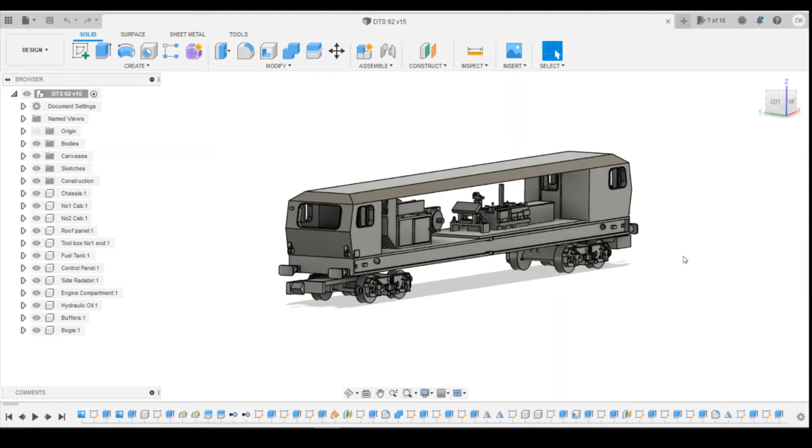In today's lesson, I'm going to continue to work in the underframe detail under here. I'm looking to do the primary equipment, which is in the middle here. So again, we're looking at things here that are really, really complicated, and we're going to just try our best to try and make something that looks a reasonable representation of it. I'm not going to sit and draw everything to the exact size scale.

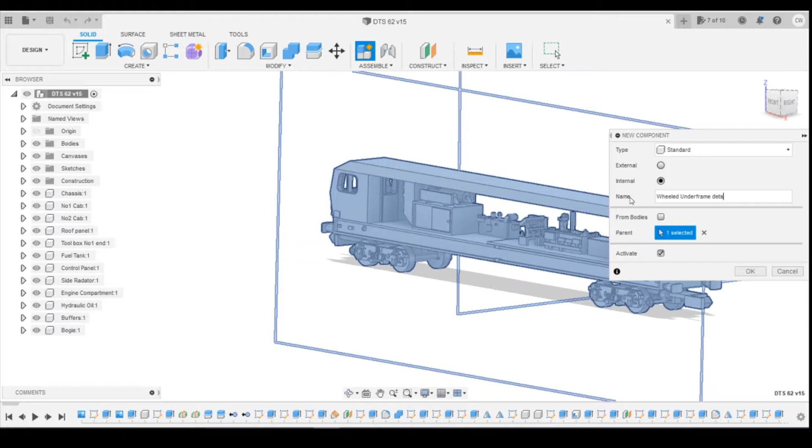So jumping into Fusion, the first thing I want to do is create a new component. I don't know exactly what this is called or how it would work, but I'm just going to call it wheeled underframe detail. It's probably got its own specific name, but for now that'll do to be able to identify what we're looking at here.

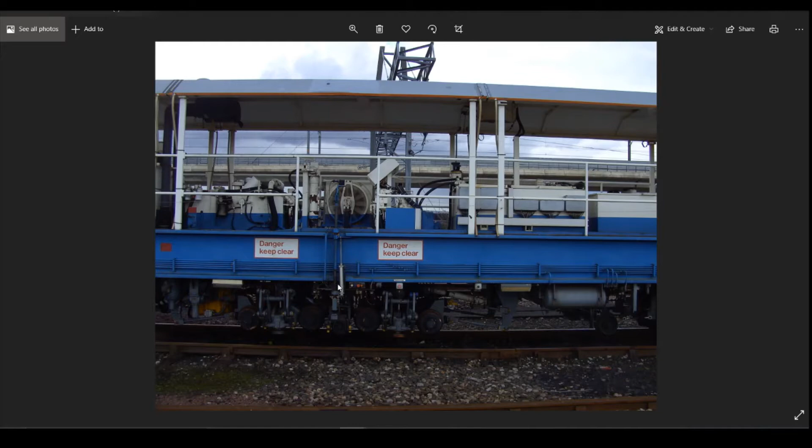So I'm going to start by drawing this wheel here. You can see now it's just offset from the middle here. So I'm going to come back into Fusion. Within this folder, I'm going to create an offset plane. I'm going to use the front surface of this wheel, because obviously wheels are going to be the same sort of size and dimensions. I'm going to create that offset plane from there, so we can start in this sort of area. So we'll create a sketch on that plane. I'm going to just move across to the middle.

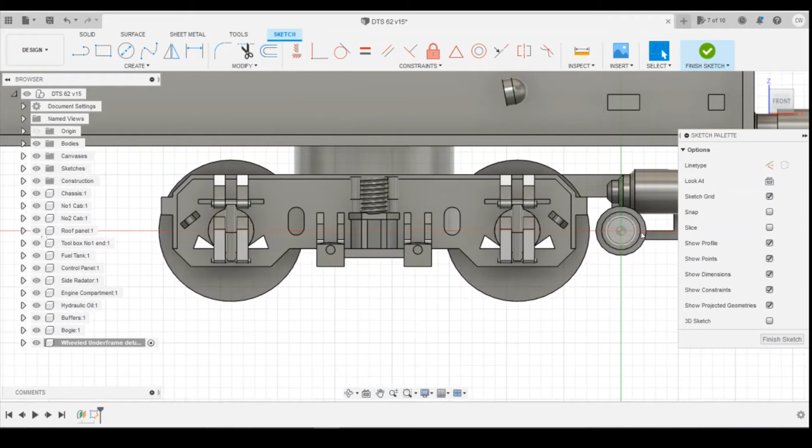Okay, we'll be using a circle. I'm just going to create maybe a 2mm circle. How's that look compared to this one? Inspect this circle here, so that one there. So we've got 1.7, so we can change this to 1.7 just to match it all up. I would say they're probably going to be similar parts.

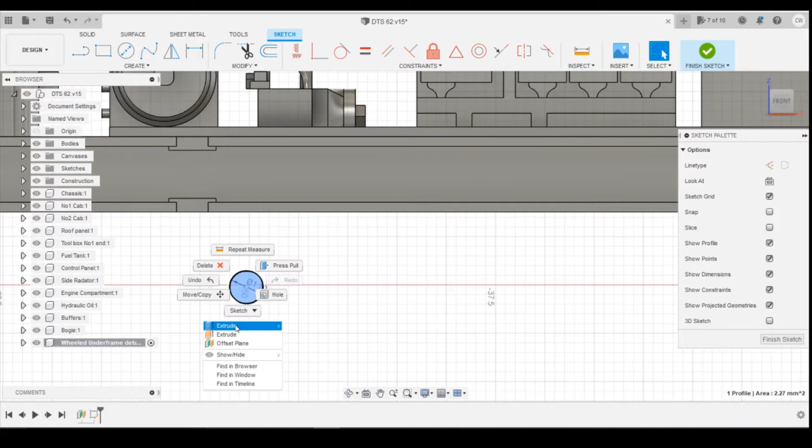So once we've got that front face, we've got to create the wheel depth. So I'm just going to extrude inwards, maybe 0.5 mm or so. Create a new body. I'm going to draw a sketch on the back surface of that. It'll be a little bit bigger just to create the flange. So 1.7, so let's go 2 mm on that. Select the outside and the inside and just extrude that maybe 0.3 mm.

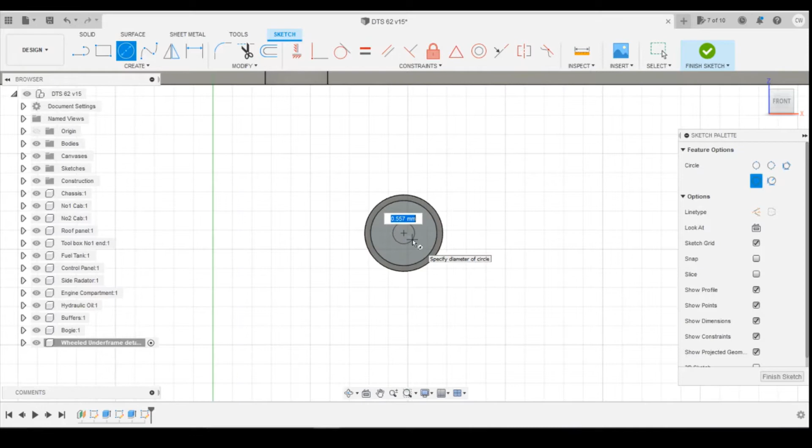Okay, so looking at the picture, we've obviously got what I would imagine is the bearing in the middle here. So we'll create on the front surface just a small circle, maybe 0.6 mm, and then just extrude that probably 0.15 or so, just to give it a little bit of relief there.

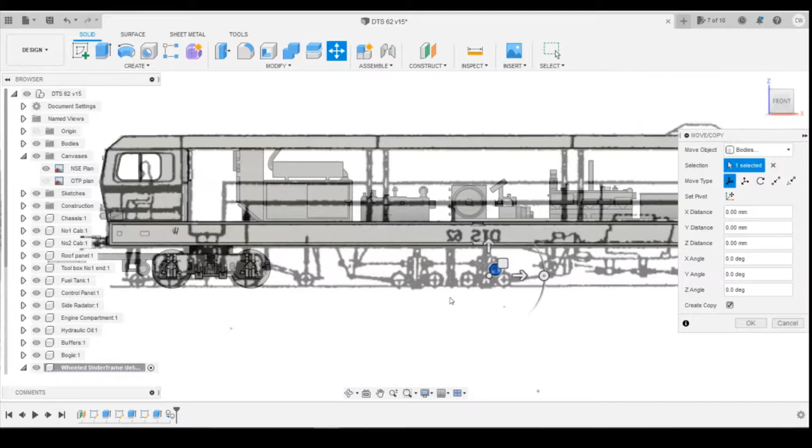So next I think I'm going to copy this across and then we'll look at adding support structures behind it. So if we drop the bodies down, select and move, and create a copy. Now unfortunately we can look at the top on the canvases, they are there, but they seem to be offset to the side for some reason rather than being centered. Looking at the pictures here, that one there, you can see how that middle is pretty much in line with the fan, which is roughly where we've got it here. So I don't know if the sketch canvas is wrong there or not, but I'm going to go with this position here.

So yeah, we've got create copy. I'm just going to drag it over, probably maybe 5.5 mm. I'll go with that. At the moment, it's probably sitting a little bit high, thinking about it. We can see if we can move those two down. If we look at the height position, it's difficult to tell really from these photos.

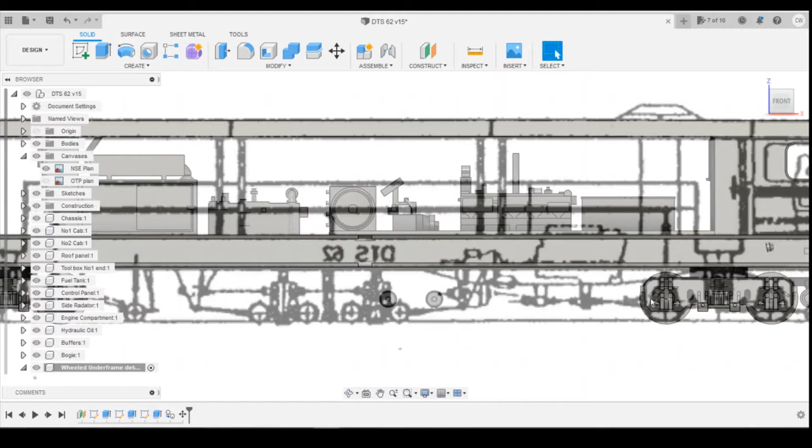So height-wise, that looks like it's sitting in line with the axles, which we can see, yeah, that's probably in the right place actually. That's roughly in line with the axle there. Okay, so we've got the two wheels.

Let's turn that canvas off. And look, if we look here, you can see we've got what looks, I would imagine, like a rectangle behind here, which the axle sits on, and you've got two diagonal support beams. And I imagine looking at that, they connect to this, maybe. Yeah, they maybe look like they're connecting to that.

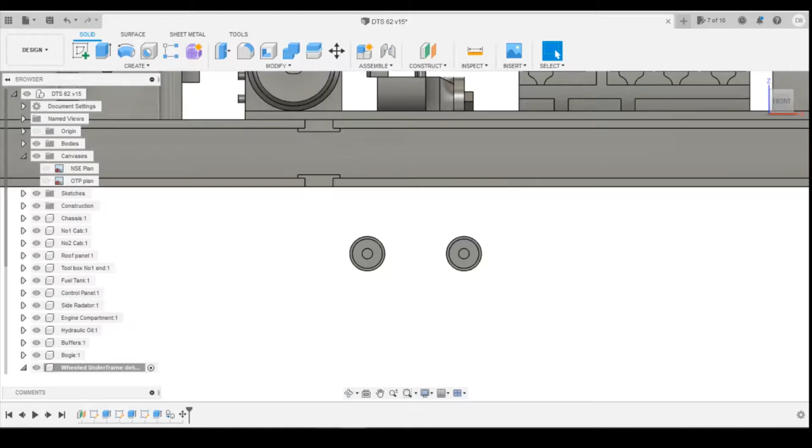So we can start by just drawing this rectangular piece that goes across the back. See how it doesn't come all the way to the outside, so it doesn't stick out either end. So we come into Fusion, we'll spin this round, so we're looking at the back of these wheels. Create a sketch, it doesn't matter which one you select. Okay, and I'm going to create a rectangle. I'm just going to drag it across like this.

We can dimension that from there. Side to the midpoint of the wheel, we'll go 0.6 millimeters. If we do the same on the other side, we might have to project that circle, and then we can dimension off of that. 0.6.

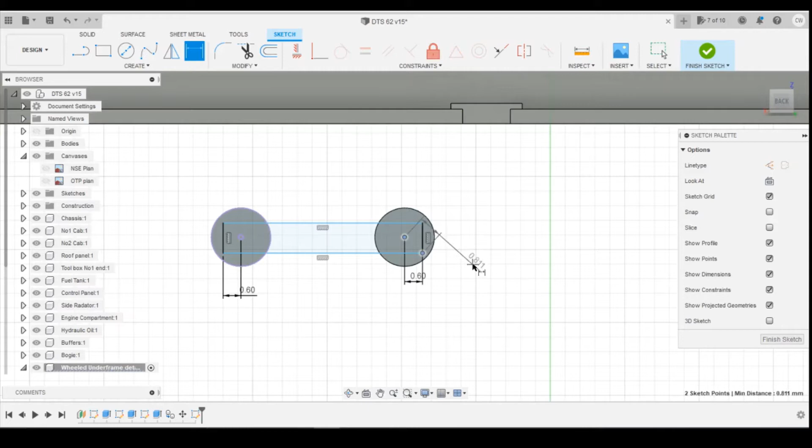Height from the circle downwards. See if we get to rotate in the right place. There we go. If we go 0.5, we can then dimension the height of these as 1 millimeter, and then it's pretty much centered there on those wheels. And then if we select the three profiles here and extrude inwards, I'm going to go for about a millimeter, and I'm going to let it join so all these become one body now.

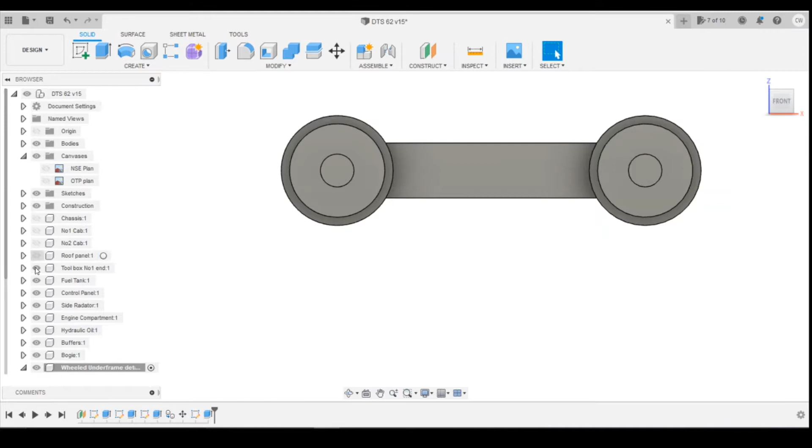So let's turn off all of this lot so that we don't have to look at that. We rotate this round. Actually, yeah, we'll rotate it round. We'll create an offset plane from that inside face of that rear unit, and let's try and work out how far across we want. So it's this.

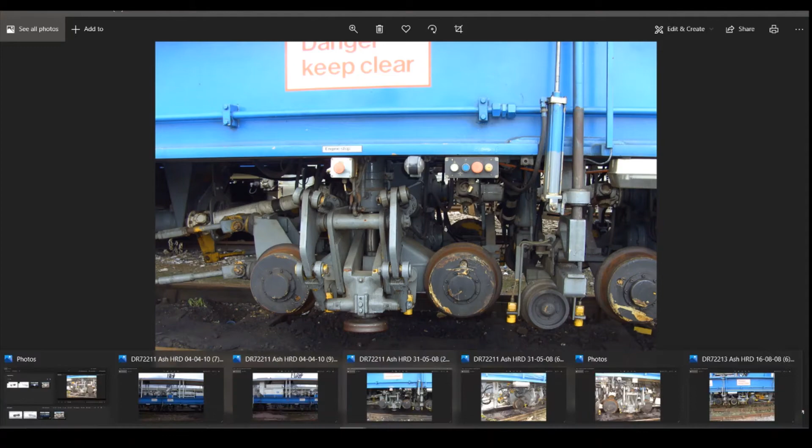Okay, so let's put it. I'm thinking about there. 2.2 millimeters in. We can probably do this upright, maybe 0.3, 0.4 thick, and then we'll have another one coming up this side here. Okay, so yeah, 2.2 across, and we create a sketch on that surface.

We're going to project in the whole of this box here, so we can draw around it. Okay, click on that. Okay, I'm going to slice.

The wheel not disappearing. The wheel not a separate part. Why is that not slicing? Ah, it's because it's the other wheel, that's what we're looking at. Of course.

Okay, so let's think about the sketch. Let's get this one here. So, coming out of the bottom level, I'm going to draw a line up there. I'm going to draw a line that comes out, does it come out beyond the wheel? No, it doesn't. It probably comes to the front face. So I'm going to draw to that position there. Let's define that length. We'll go 0.7.

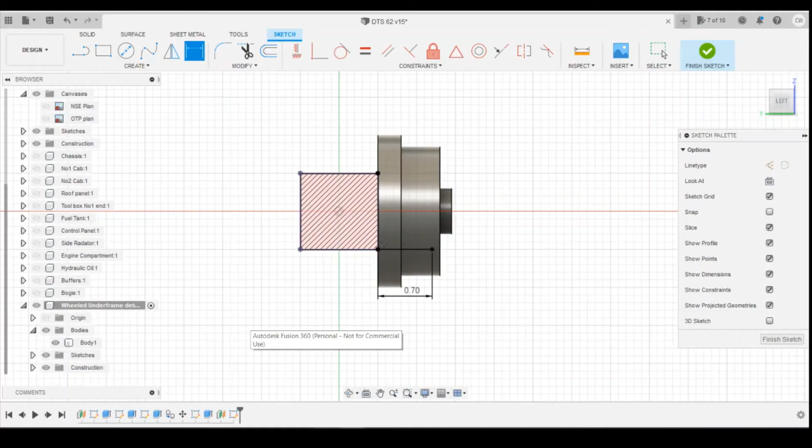Okay. This, I'm going to draw it up and over. So it's going to be up high, so I'm going to put it in sort of this position up here. Does that work right? Because it's going to have these diagonals come up that meet it.

So let's draw a line, let's diagonal that up. We'll come across the unit like that. And this curve looks like it goes to where the back of this is. So if we create another line that comes up there, we're just going to use this as like a construction line there. And we're going to create an arc.

Tangent arc. I'm going to go from that point to that point there. And I'm going to trim off that edge. We've got the curved up and over unit.

This looks like it's maybe 6 inches or so thick. So if we now draw a line, if we come up 6 inches, it's going to be 1 millimeter in gauge. And then we draw a line, just come across like that. I'm going to draw a diagonal line that comes up and meets it. And then we're going to have to curve the top off there.

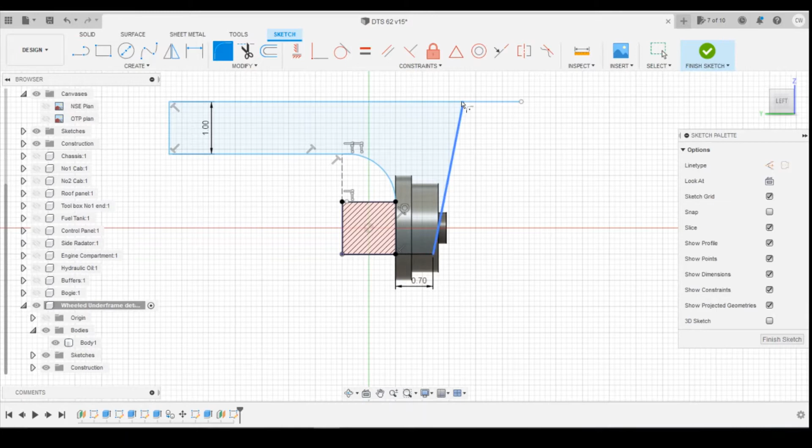So we can fillet between that line and that line, go maybe 0.4 on there. Let's define that angle there. So that measurement's fine, I didn't want to do that, but it's done it. Okay, so we'll go for 100 degrees on that angle, and then that should define pretty much this bit here. Got to define there, so let's go for 5 millimeters, just so it's defined.

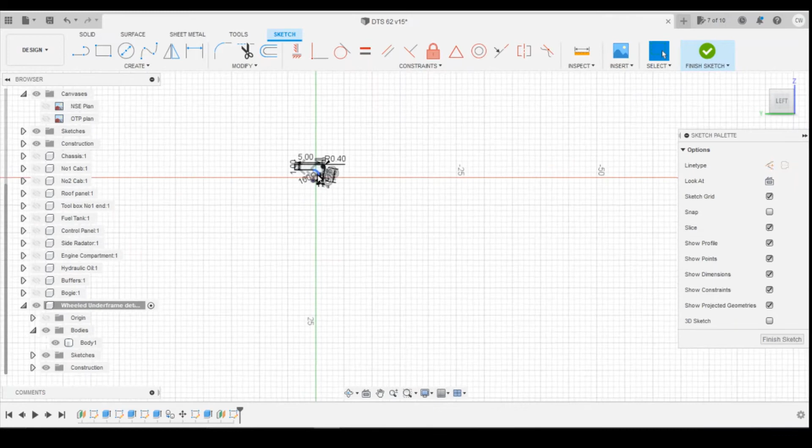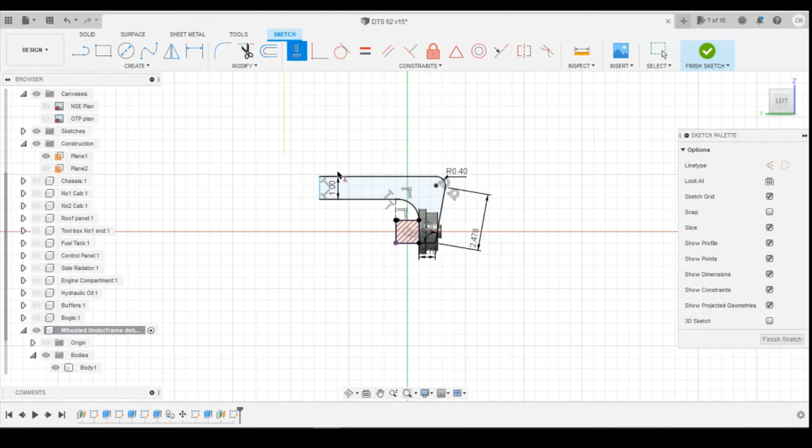I'm going to do this all the way across to help make this the mirrored part over. So I will have to get the midpoint. That one, I'll delete that. And I can constrain that corner potentially to the midpoint. Maybe not, maybe horizontal, vertical to the midpoint. Nope.

I'll fix that in a bit, I'll come back to that. So let's extrude that. Let's go the other way. And I want that to be minus 0.4, I think. So we can get away with having that thinner piece here because it's supported. We're going to have all the other stuff behind it to give it extra strength.

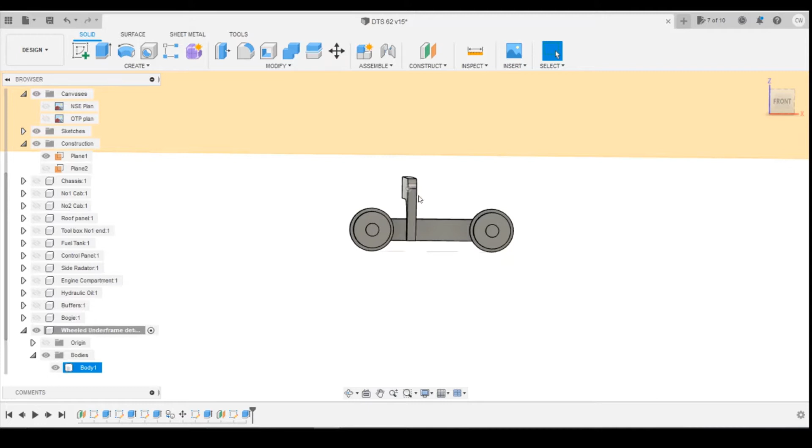Okay, happy with that. What I want now is, let's spin this round. I'm going to draw the diagonal piece which comes upwards on the back. So this piece here, and we're going to draw that, and it's going to meet up. Actually, it doesn't actually look like it touches, but I'm going to get it to touch for extra strength.

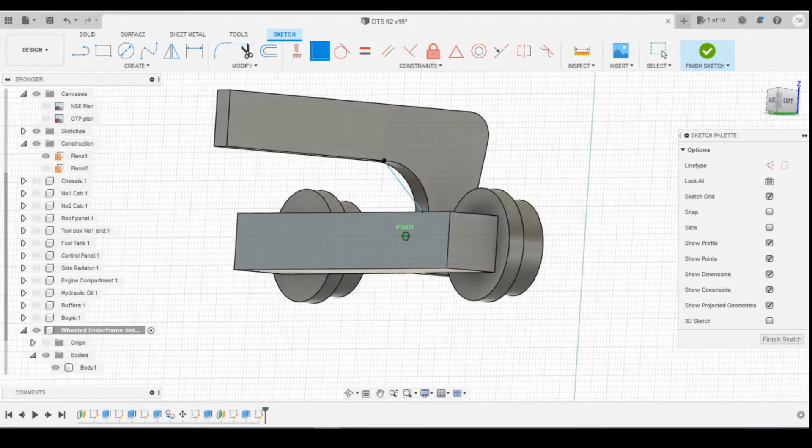So I'm going to draw a sketch on this back surface of the machine part here. I'm going to draw a line, and we'll go up to that line there. So I get it to be coincident to that corner. Okay, you can see where I'm going with that, and then define distance there for 0.9 millimeters.

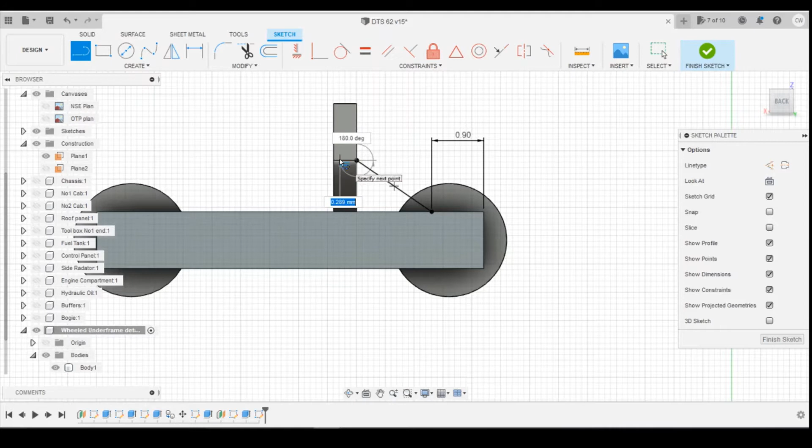And then I'm going to bring that line across, coincident to that corner, and then down to the bottom rail there. That's closed that off, we've got that triangular piece there. I'm going to extrude that, level the front surface of the unit, tell it to join.

I think I actually wanted this corner curved. Let's just go back in the history to that point. Edit the sketch, it was curved. What's caused it is me extruding back into it. I'm going to leave it as is because I want the extra support in here, so this is all protected.

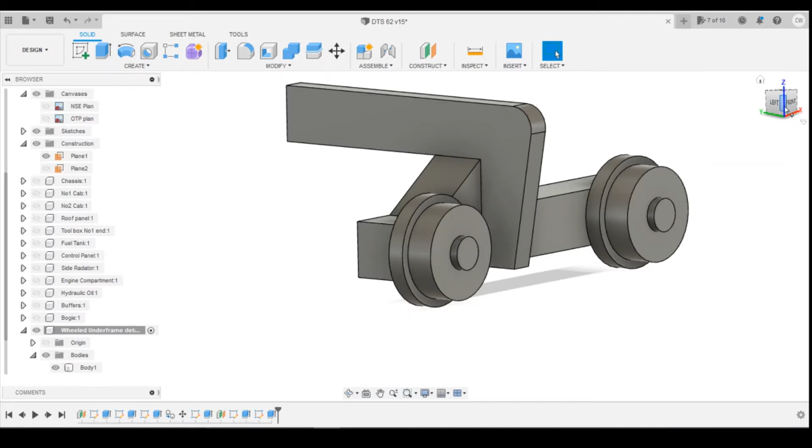Okay, let's look face on now. So that's this piece coming up that we've just drawn. So now I'm going to draw that one going in there. What I'm actually going to do is I'm going to split this in half.

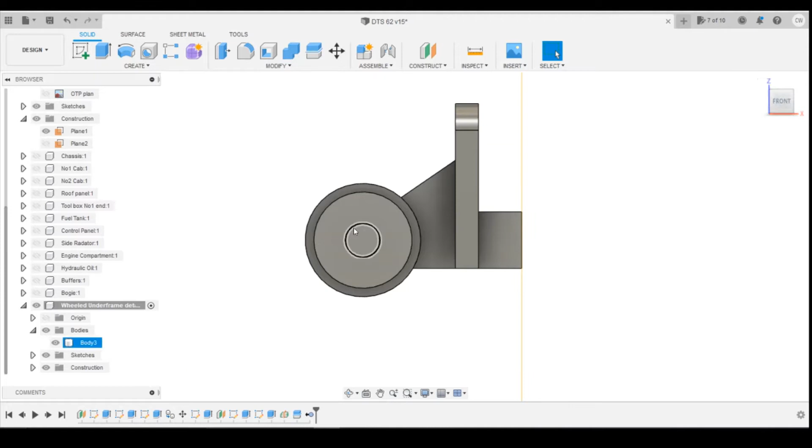Let's create a mid-plane, so you want a mid-plane between the end of the back piece there and that back piece there. And then I'm going to split the body using that mid-plane. And I'm going to remove body one, keeping this part. And whatever I do here, I can just mirror across. Turn that construction plane off.

Okay, so the next piece, as I say, is that coming down here to this circular piece, and that's got some dampers that come out over the top. So I think I'll draw that arm first. No, I'm going to draw the circular piece first, I think. And we can get everything to match into it.

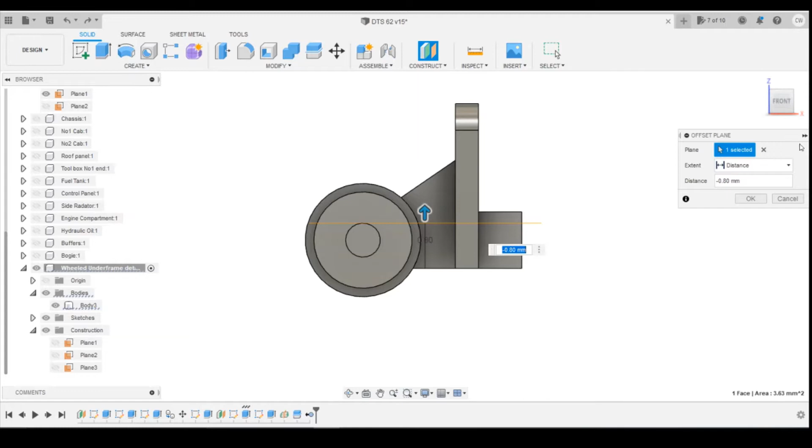Okay, so for that I need to draw on the bottom surface here, because, is that right? No, I don't, undo that. I need to create an offset plane from that bottom surface. I need to come up slightly. So what I'm looking at there is the top of this unit is going to be slightly above the top of the actual point here on the wheel. So about that sort of position, 0.8 from that top. And I'm going to create a sketch on there.

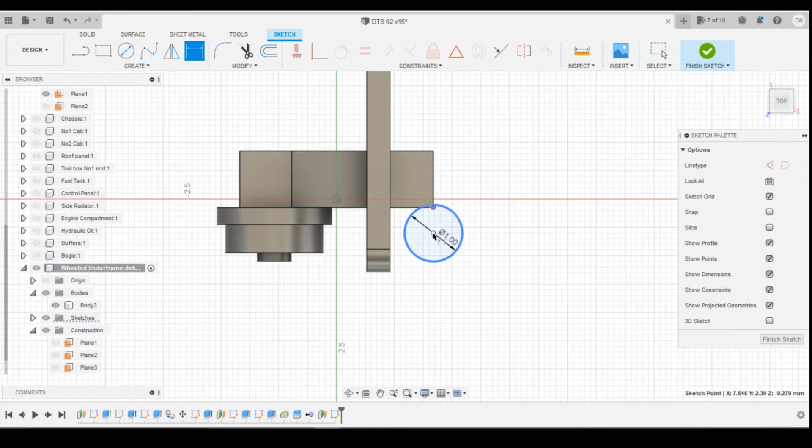And get a circle. Actually, project that point there, and we create a circle in line with that. Let's go for 1 millimeter in diameter. And define a distance from that point of 0.4.

Okay, now we're going to extrude this downwards, so make sure we select all of the... let's got that part there. Select all that profile, extrude this. We're going to come down to... so the bottom of it looks like it's in line with the bottom of the wheel there, before we got this extra part on. We're going to come down to like there. So, 1.1 millimeter, tell it to join.

Okay, so the next thing, now we've got that position, next thing to draw is this part coming in the middle here. So I'm going to create a sketch on the inside profile of that.

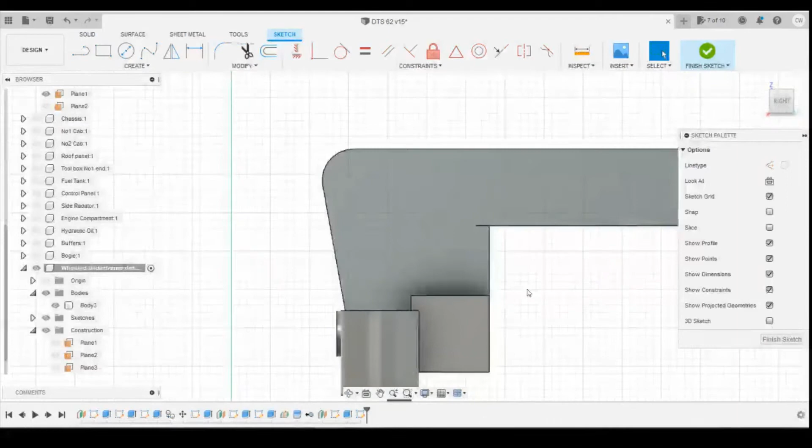So I'm going to project the top rim of the circular part we've just drawn there. And I'll draw a line starting above it, but sort of roughly where it is in line. You can see how that comes and curves down. So I'm just going to be slightly to the right, but slightly above it. I'm going to go diagonally up and snap it into that top part there.

Weird little line there, snap into the top. Let's define the angle there. If that's sorted, I'll go for 25 degrees.

And then I'm going to do a spline point, I think. I'm going to go from there, just use 2 spline points, click on OK.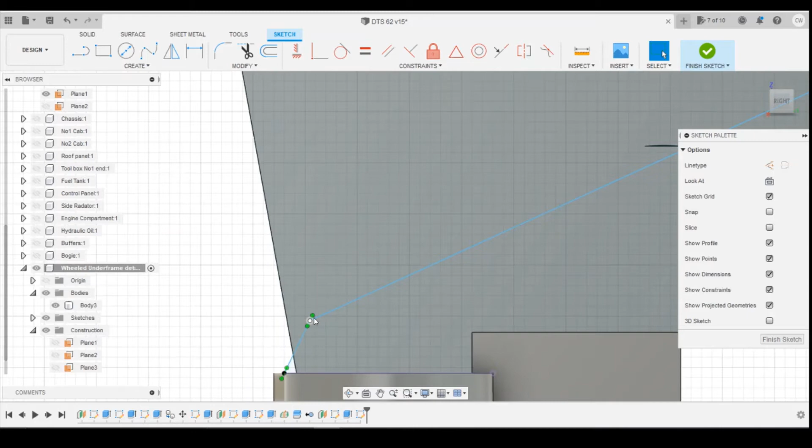I'm going to come to this bottom one here, select the little green line, and tell it to be horizontal, vertical, so that snaps upwards and straight. And then I'm going to tell that one to be tangent to this line, hopefully. So select the little green part, tangent to that line.

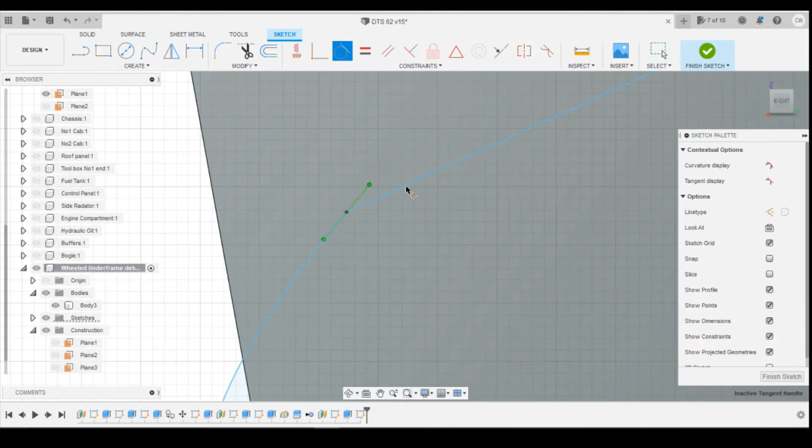It won't do it. It's fine, so it'll come down, and we'll just play, and we'll get the... there. So snap that end to this line here.

You didn't need all these green things. This is an update they've done. I don't know why they've done that. I'm sure there's a reason, but...

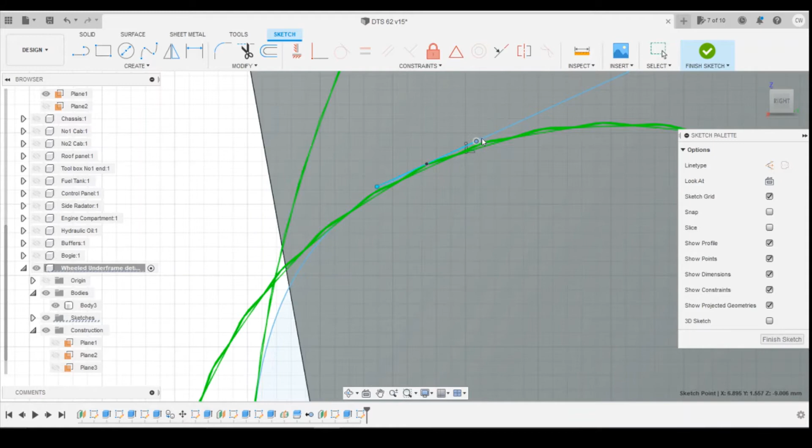Okay, we come out of there. We can see how we've got a curved part there. Well, if we grab that, we can just drag that out slightly, and it'll help to curve that round. So just making this long, see how you adjust it by just dragging. I want it to come up slightly and curve around to it. Yeah, happy with that.

Okay, so now we need to turn the rest of it into a profile. So what's going on at the back? We can't really see what goes on because it's hidden behind the damper. So we can go with that profile quite happily and just extrude that across.

See how it's now coming into touching there.

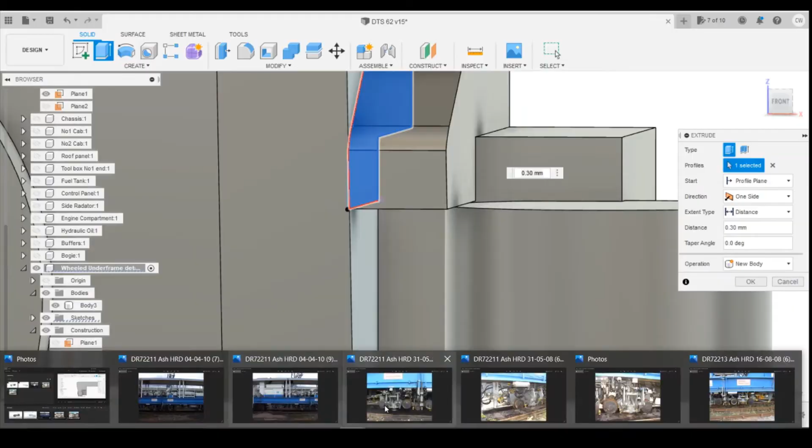Probably what I'm going to do actually is make this circle a bit wider. So pull that across 0.3, tell it to join. Let's go back into that circle now, edit that sketch. You can probably make that 1.5. That's too big. 1.4.

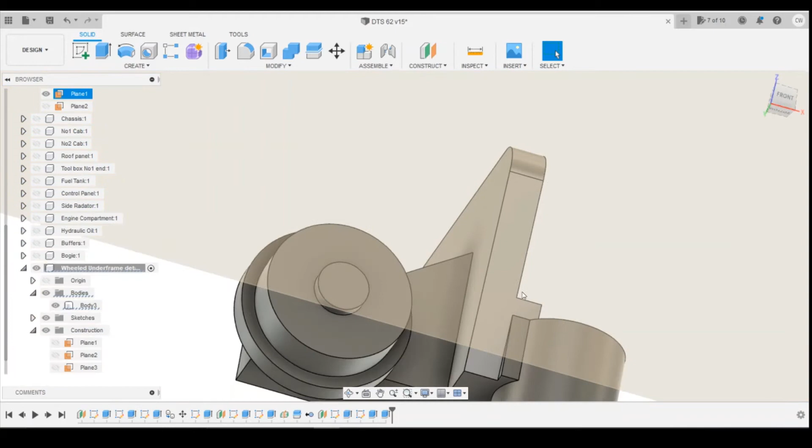Okay, and then I'm going to just grab this bottom surface in here and extrude it down to the bottom of this part, put join. Again, it's just adding a little bit of strength in there. You can't really tell what's going on with that. Not sure why it hasn't... that's fine. Okay, so that's looking okay with that.

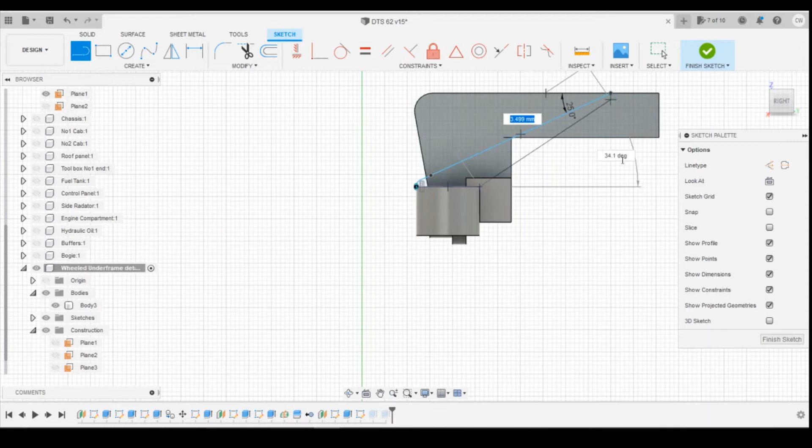That should have gone all the way up. So I probably missed part of the... what I need to do now then, because all that's done is this part, is draw a line from there, in line with that one, and up to that one.

And then edit the feature on that, selecting those two profiles. So we're now adding that all the way across to the back here. So it's all looking at supports, giving the shapes that we're trying to recreate.

Okay, so we've got nothing on the top of here, but behind it there's a damper, and that looks like it's sitting on top of this cross member, and it's going to be in line with the middle here.

So what we can do is, if we spin it round, if we draw a sketch on the inside surface there, and draw a line, find the midpoint, how far up does that damper go? So that goes up all the way into the body.

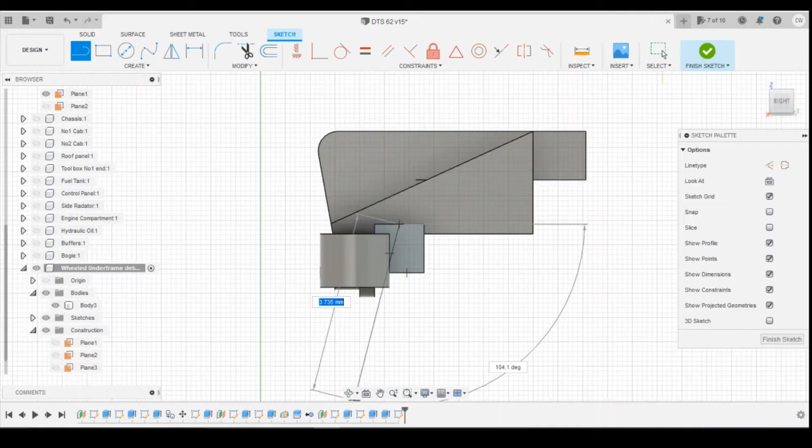I'm actually going to go, let's turn the chassis on. I don't want to go any higher than the chassis, because it's fine to go up to the chassis because it's going to attach there anyhow.

Let's draw it up like that. Tell that to coincide to the top line, that'll stretch that out. Now we've got that line, we can use the pipe tool.

Circle wise, I'm going to go for maybe 0.5 for the bottom. Turn the chassis off because I don't want to join that. Set that to join.

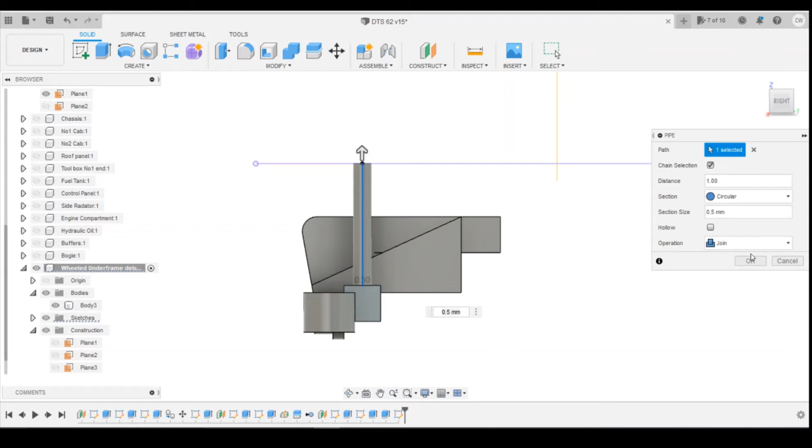That's fine. And then we need that sketch back again, that's number 9. And we'll do pipe again, draw on that line. Actually need to go start from the top.

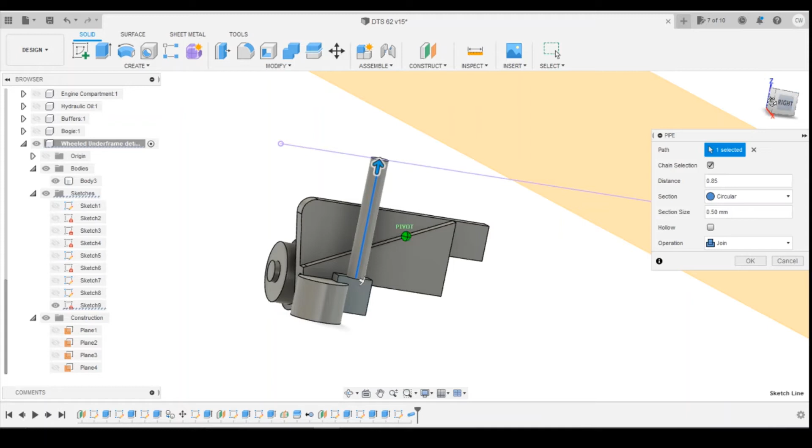That's a pain. Why won't it go from the top?

Okay, so I think what's happened is because I drew it from the bottom to the top, it's trying to go up the pipe. So what we're going to do is go back in this pipe, edit that feature. We're going to change that to 0.8, and then we're going to create a pipe again using the same feature. This time I'm going to tell it to cut. No, that's not going to work either.

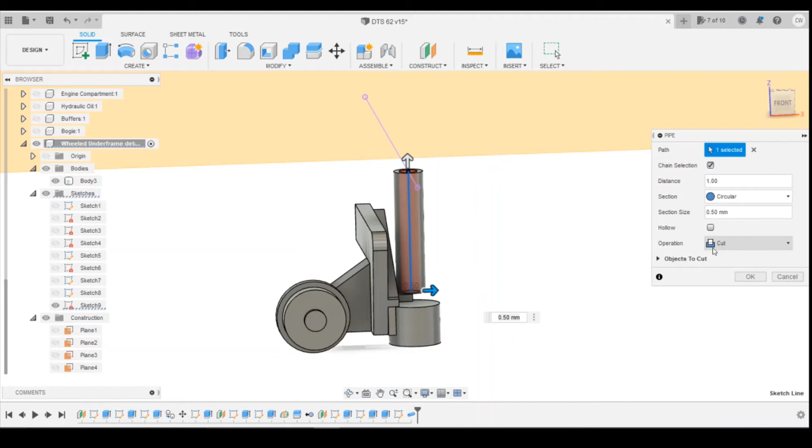Okay, so that's not going to work. So what I'm going to do is create a sketch on the bottom surface of that circle. Use a circle, get the midpoint. So we know that's 0.8. So if I go 0.5, which is what I wanted in the first place, I can select those two profiles. Why is that not a profile there? Okay, 0.8 circle. Select the profiles there, and then extrude that upwards, and that will cut that off.

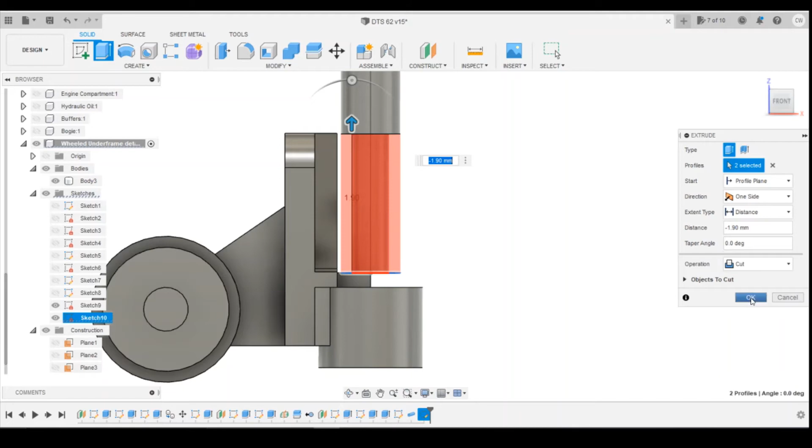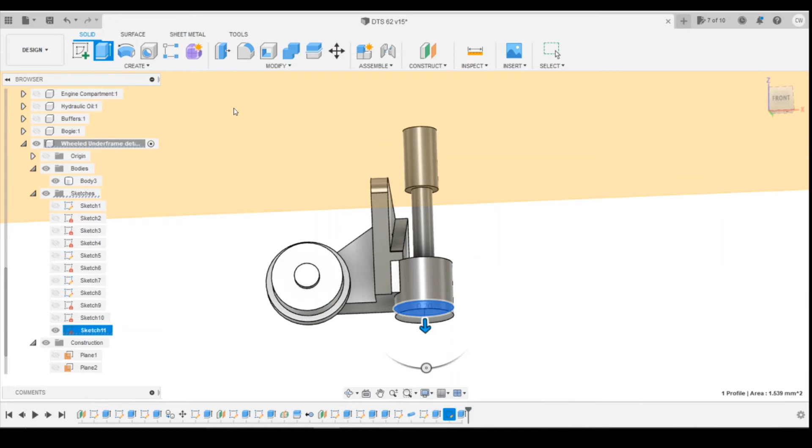Okay, so if we now get this smaller wheel drawn on the side here, what that probably requires is this to have an extra piece coming out of smaller and then bigger again. So I'm going to create a sketch on that bottom surface. Actually, no, I'm not. What I'm going to do is just extrude that down slightly. So I come down maybe 0.2, tell that to join, and then I'm going to chamfer off the bottom edge, 0.2. That's what I'm after. And then I'm going to extrude that down.

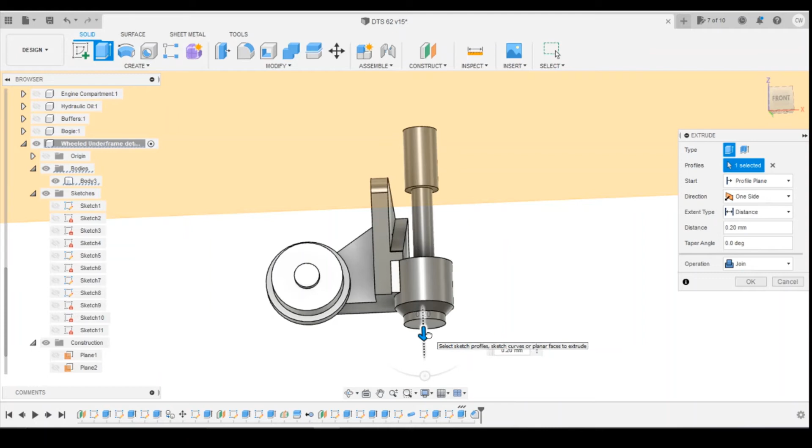Maybe 0.3, and then it's going to have a sketch on the bottom surface for the actual wheel here. I'm going to do the extra wheel, say 1.8. It's gone 1 for some reason. 1.8, and then select that profile and extrude that. How does that look? I think that needs to probably be a bit higher actually.

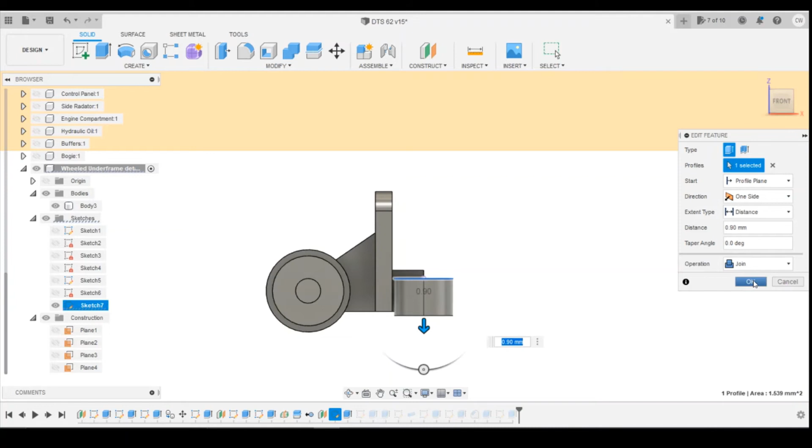So what we can do about that, join to start. Okay, I'm probably going to have to shorten this bit. Let's have a look at this feature. Let's bring that up a little bit. I'm going to come up to 0.9 on that. That moves all that up. Maybe make that little bit in there a bit smaller. Let's go to 0.1.

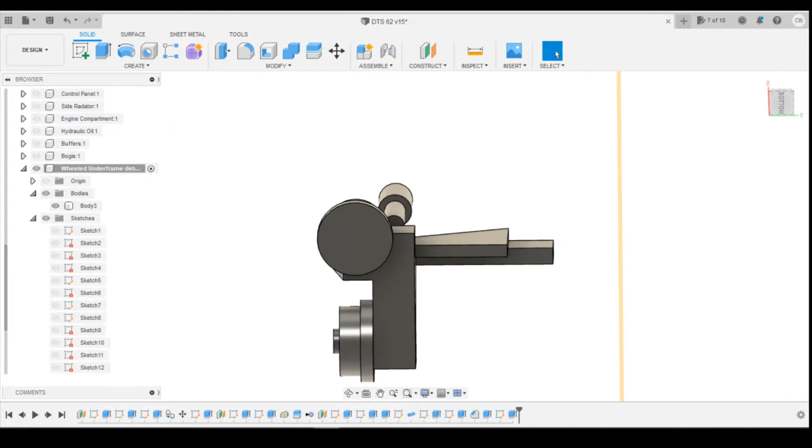That's probably better because that's in line with the wheel, and this I think is supposed to run on the edge of the rail. So having that in that position probably would sit better. Probably supposed to sit further out as well. Wait a minute, look, see, it twists. This is what these arms are probably here to do. Okay, so it doesn't really matter at the moment that it's sitting in, because we can work it. This whole thing's going to pivot out of the way. So yeah, I think I'm going to go with that as it is.

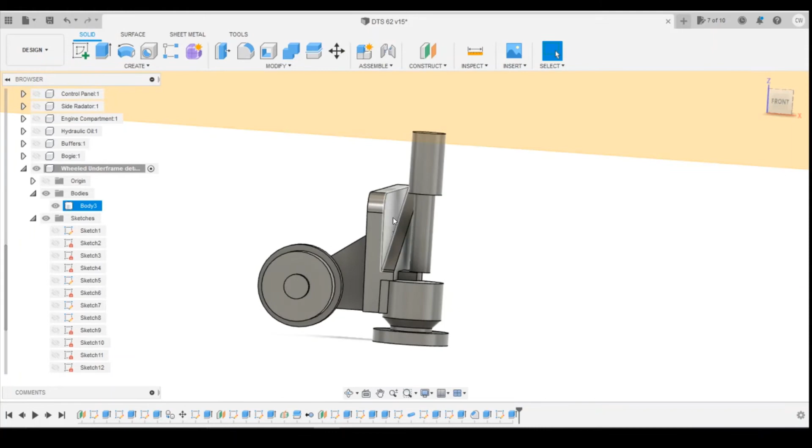Okay, so the next thing I'm going to do is put this rod coming across there. I think that would be on this one. Don't want to do that yet. Put it on that surface. Let's find the center point of that curve there. Coincide it, so 0.6 millimeters. I'm going to extrude this. And again, I'm going to make sure it just goes way past that midpoint. I'm going to get rid of all these bits when I chop that down, so I'm not too worried about the length of that for the moment.

Okay, now I need to draw this triangle piece. Let's have a look on that one. So you can see it's not even a triangle piece, it's an odd shaped bit. It's going to be on the outside of that circle. So we can use that circle to create this part going on the outside.

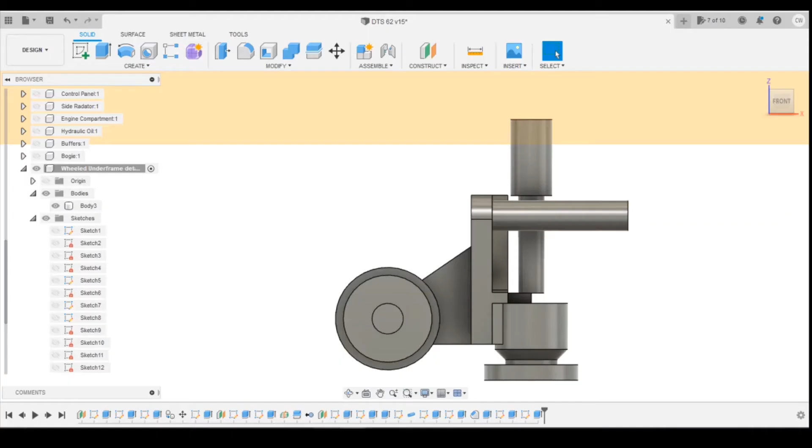Come back into the sketch, I'm going to edit this, I'm going to extrude that. Let's come out 0.6, cut, join, and create a sketch on that top face. Okay, it needs to be slightly bigger, so we're going to go 0.8 diameter circle there. Not that I want a circle, but it's going to create the arc to come round the outside, and then I want to come down straight line at an angle.

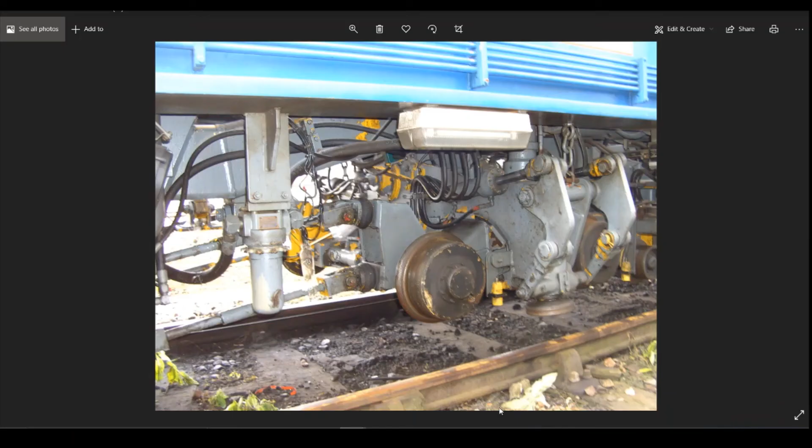I'm just going to come across like that, and I know that's going to cut through this piece at the moment. You'll see what I'll do is if I now click OK, come back up to tangent that line to the circle, that'll come off there at the right point. Find the length of that. There. Try again. Find the length of that. I'm going to go for maybe 0.8 millimeters in length. Maybe long enough, yeah. Because then I'm going to curve round down slightly. So another circular part for there.

Arc. Oops. Tangent arc from there to there. I want a line. Draw it like that. I'm going to put the line parallel, so that line's got to be parallel to there. Undo that. I want the line to be parallel from that one to that one, so they're matching that direction. And the distance between them, I'm going to go for 0.6 millimeters. And then tangent arc from there down to there.

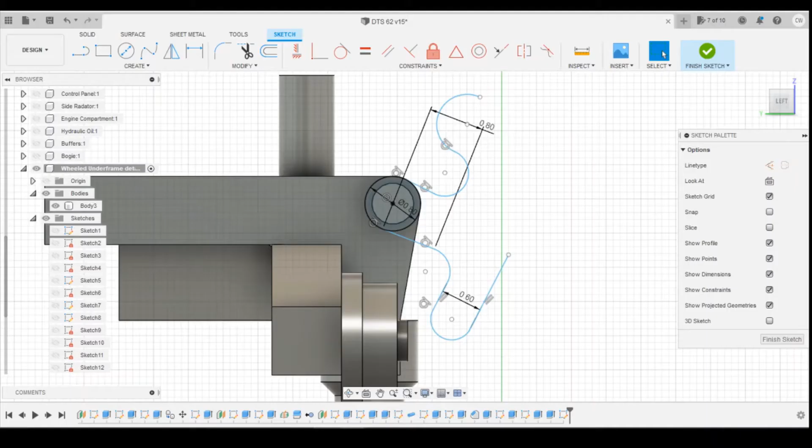Point it down slightly. That and tangent to the circle. Something like that. And then I want another arc to go the other way. So you see I'm using 3-point arc here, coming up here. That to probably come up a bit more and then draw a line from there to there.

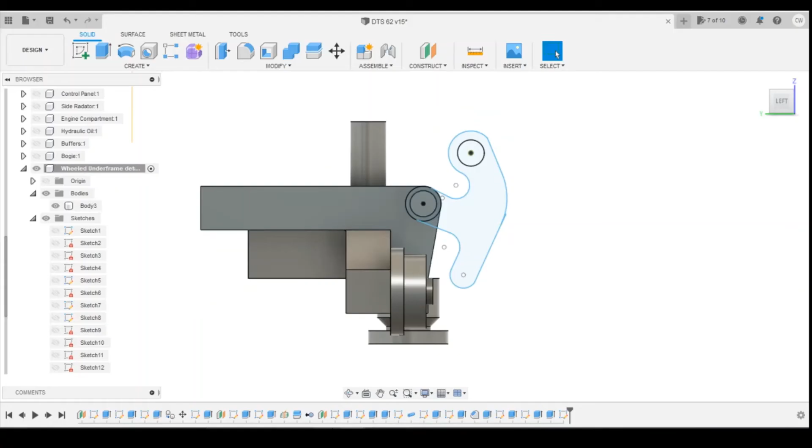Right, let's fix that point so that can't move. And then if we curve this corner off, 1.45 that'll do. It's not perfect, but it's getting to look okay. Is that not joined for some reason? It has. Let's see what's going on there. Trim that little bit off the end there.

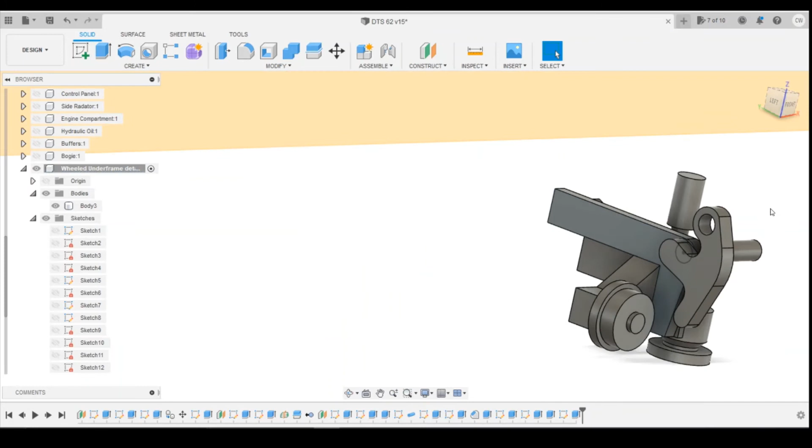I'm going to create that shape. 0.5. See, it's going to have a little bit sticking out there. We need to grab that profile there as well. Set that to join. Grab that inner profile, that circle. I'm just going to extrude that extra 0.7 so it does actually have that little piece sticking out on the top here.

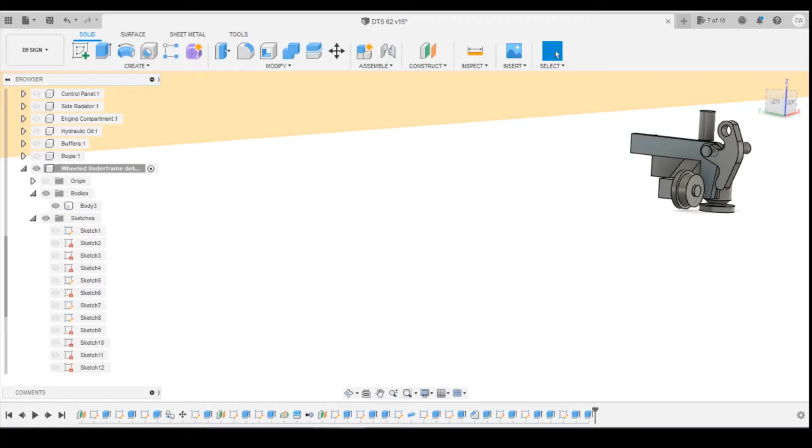Okay, so now I'm going to move down here and create this coming across here. To do that, I'm going to have to split this again because I'm on a halfway point here. So let's split the body, select that one, splitting tool. Let's find that mid plane, which is number 4 there. Split that, we're going to end up with a load of bodies here.

So let's work out which ones we don't need. So that body there, so we can remove number 3. That body there, so that's number 4, we can remove that. And that part there, that's number 5, so we can remove that. We're just left with the half here. Good. Let's turn the construction plane off.

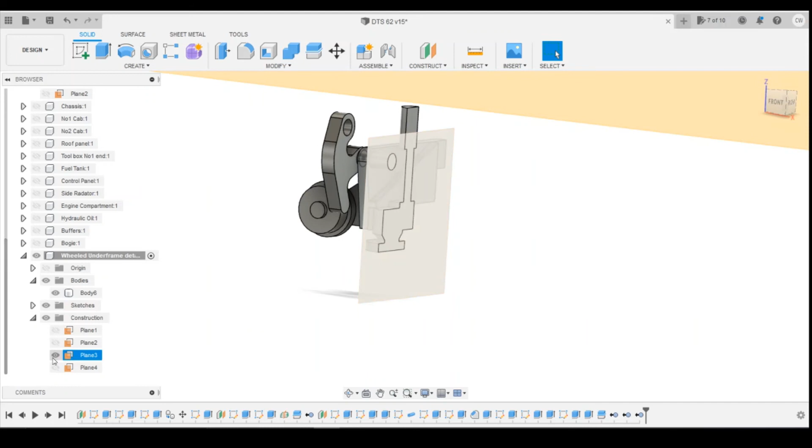Okay, so as I say, we're drawing this, so I'm just going to draw a little circle, rod or something type shaped, and it's going to be sitting sort of in this position. Create on the inside surface where we just cut. Let's create a circle. I'm going to snap the midpoint to that line. I'm going to go for maybe a 0.4mm circle. Define its distance from the midpoint to that bottom part. Find these 2 points here. Let's go 0.2 just for ease.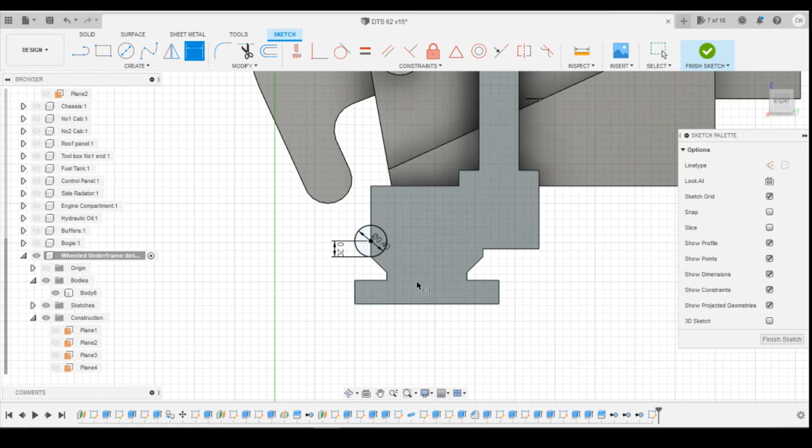Okay, and then we can select that outside profile. Yes, we want the inside profile as well, so we need the whole circle selected. Okay, and you can see on the picture that's going to come across pretty much in line with where that midpoint of this part that we've just drawn is. So we need to go all the way beyond. Yeah, probably because it's going to have a piece coming out of it. So go 1.8 across, tell it to join. Actually thinking this might come up a little bit in a bit.

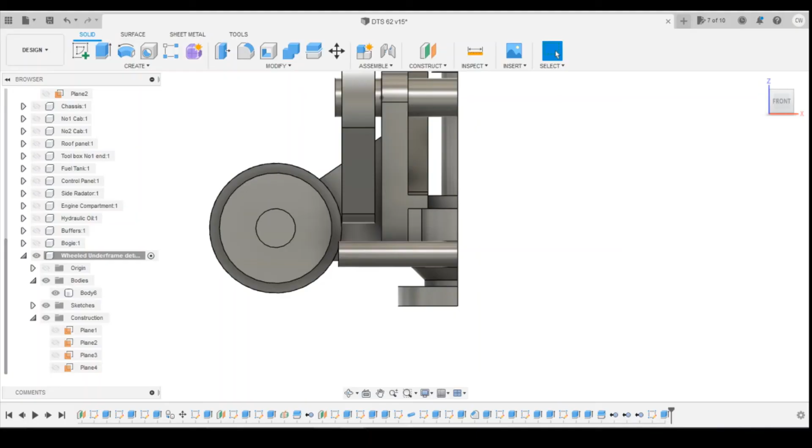Okay, now we need, I'm not going to try and overcomplicate this too much. There's a pipe coming up that's going to go into it. It's got a rod coming through. So, let's draw a sketch off of that outside surface.

I'm going to go for a 3-point rectangle. I'm going to use the 2 points of the arc here. I'm going to come down maybe 0.4, and I'm going to also do the same rectangle above it. So 3-point rectangle, go from those 2 points, come upwards maybe 0.4.

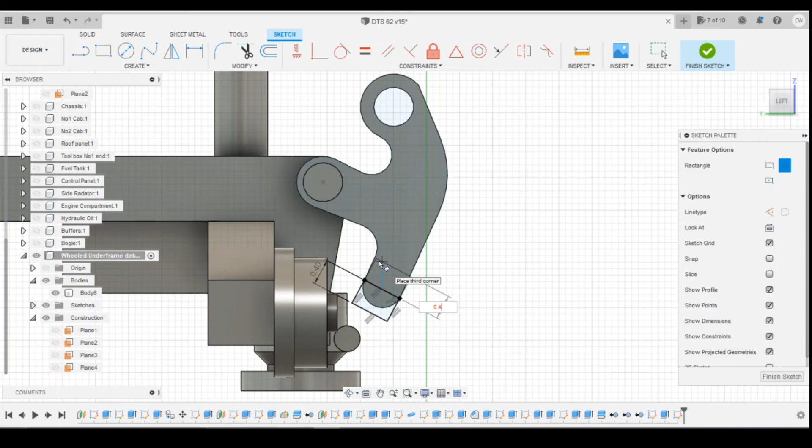Select these inner profiles here and extrude that outwards slightly. Doing 0.2. Tell it to join, and then want to mirror that feature. I'm going to use the mirror plane. If I do that, I'll just get halfway. I need a halfway point.

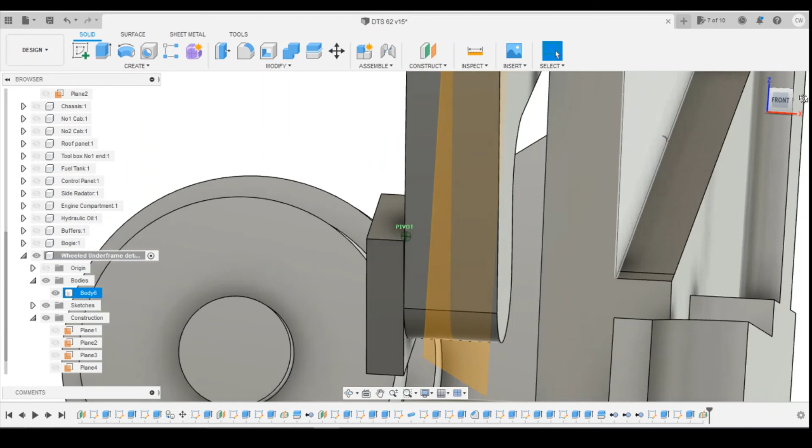So we'll have to construct a midplane between the two faces of that part, and then mirror the features of that rectangle across that midplane like that. Good, and then let's construct a rectangular part that's going to go from that corner. I'm going to constrain it to that corner there. So select those profiles and come down.

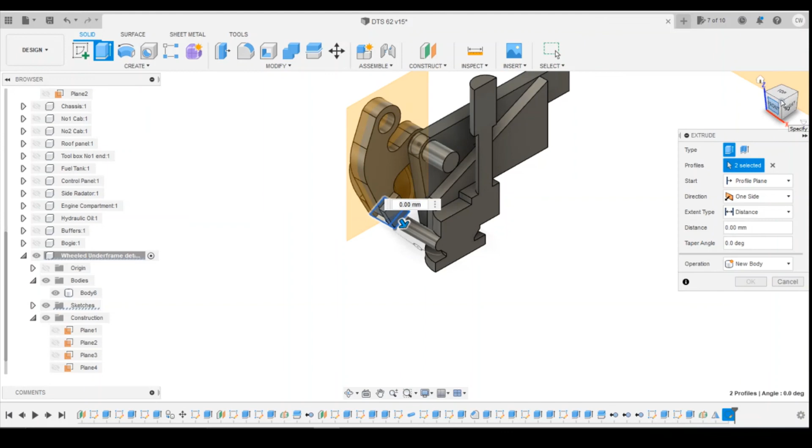Let's spin that back round so we know what we're looking at. You can see what I'm doing here. I'm just creating the base. I want to come down. I come down 0.2, tell it to join. So it's creating like a U-shaped piece there. This part needs to be smaller. Let's just go back in the history. I'm going to shorten this up a little bit.

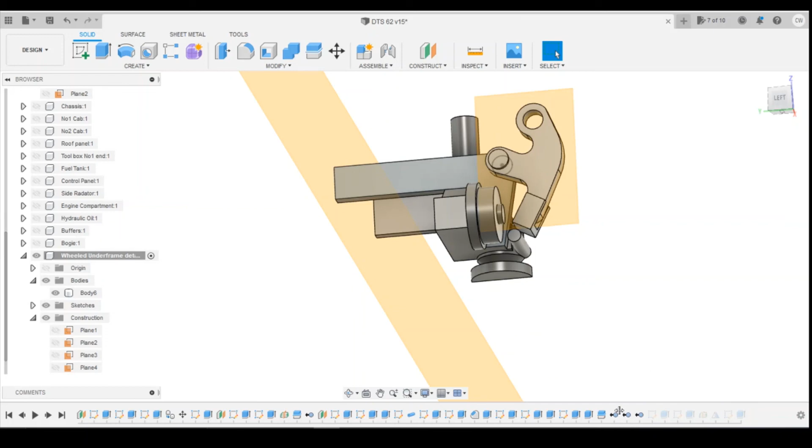That sketch. Edit that. Just going to select those parts here. I'm just going to drag that up slightly, and the same on this one. Drag that up slightly. Okay, jump to the end of the history. Let's just shorten the height there a little bit. I might just shorten those up a little bit as well. Edit that sketch. I'm just going to make these a little bit short, so we're going to come for 0.3 coming down.

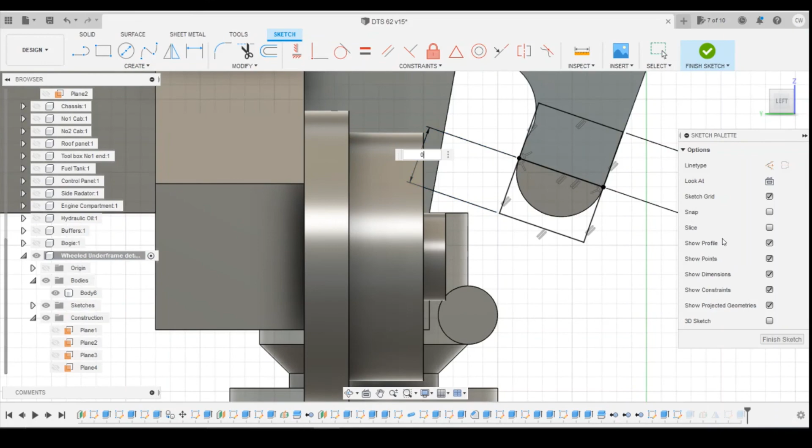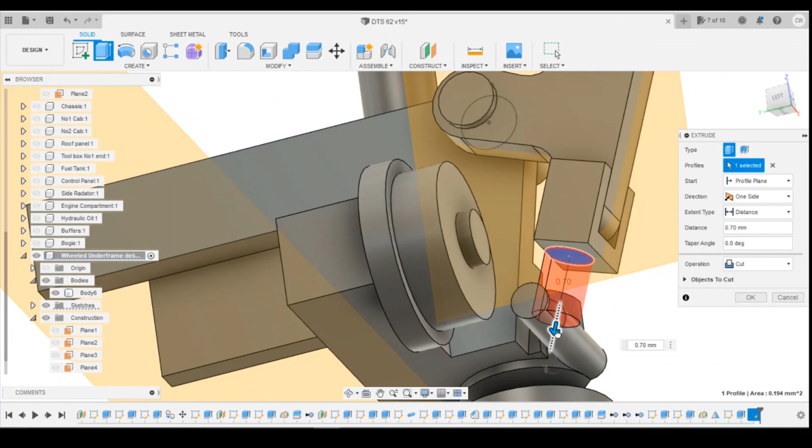So you can see the curved part in there, just shorten that up, and I need to try and now get an arm to go between these two. So I'm going to create a sketch on inside of that face. Do a circle, got the midpoint. I'm actually probably going to come back beyond the midpoint slightly, go 0.5, select the circle profile, and then extrude. Hopefully that'll intersect and then it will look okay. Let's join there.

Turn that construction plane off so you can see, and that construction plane off. Okay, so yeah, it's really complicated what's going on here, and as I say, I'm trying to wing it a little bit to try and make it look something like what we're working with. If we now mirror this body, that'll give you a really good idea of what we've got here. So body 6, mirror planes and the inside surface.

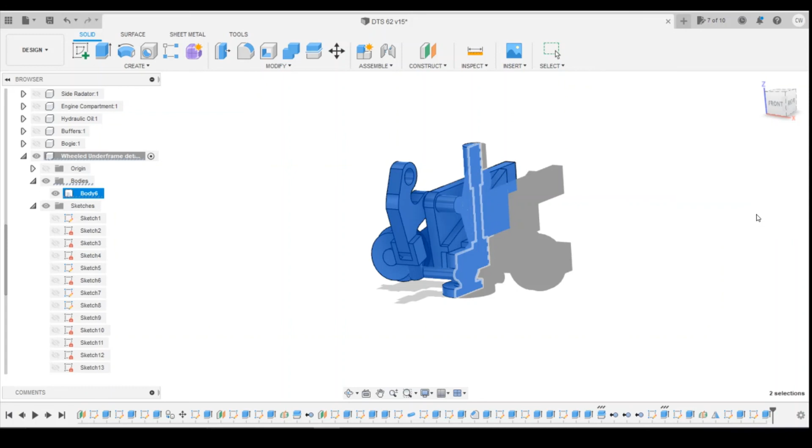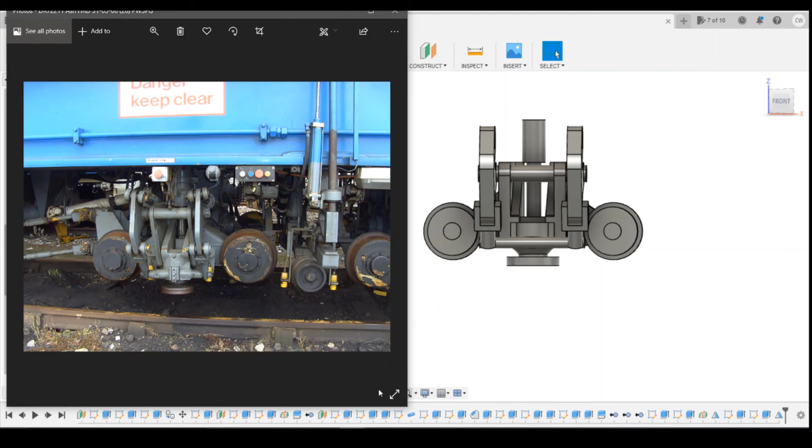Okay, so if we look at that, let's bring up this picture, minimize it so we can have the two of them side by side. Now, what are we looking at? Are we looking at something that looks reasonably okay? And it's not perfect. This is probably a little bit too long here, which would mean these to be a little bit higher, but this is not trying to be a perfect representation of what we've got here. This is trying to look like what it is. It's a complicated piece of machinery, and stick that two of them.

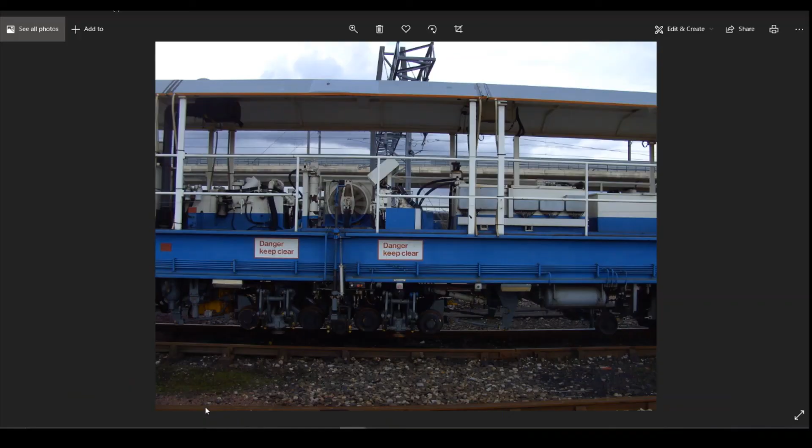Stick the chassis. Let's get that in. Let's get the bogies on. Let's just create a copy of this body. Paste it and move it across. I'm going to delete this in a second, but we just do that. You can see how it's starting to look like these bits. There's enough going on there that will catch the visual eye and make you think, oh, that's complicated. Okay, let's undo that. So it's back up to the one.

I'm going to finish this episode here and come back and do some more work around this on the next episode, because I'm conscious this is getting quite a long one and it is complicated. I'm not going to say it's going to be easy to try and copy it. Just try and do your best and try and end up with something that looks sort of what we've got here.